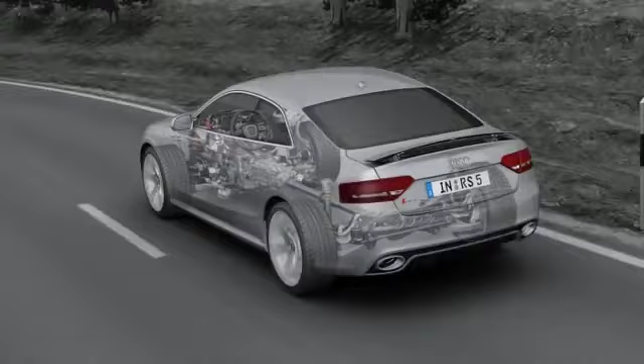The Quattro permanent four-wheel drive system has a long tradition stretching back over 30 years. It permanently and optimally distributes the power from the engine to all four wheels, providing a high level of active safety and reliable traction on practically all surfaces and optimal straight driving. Its permanent safety advantage makes it far superior to other all-wheel drive systems that have to be activated.

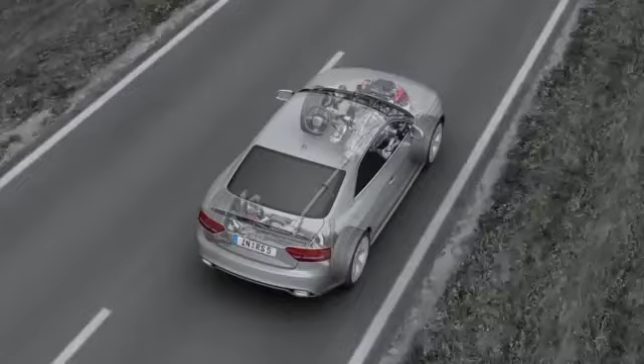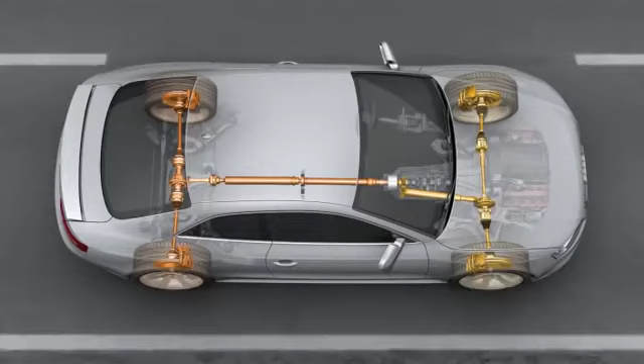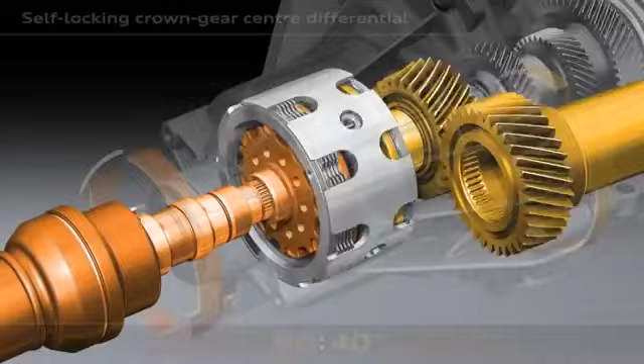The principle is simple: just as four brakes provide for better deceleration, four driven wheels provide for better acceleration and greater lateral stability. The new Audi RS5 sees the introduction of the latest generation of Quattro with crown gear, center differential and torque vectoring. The task of the center differential is to distribute the drive force of the engine to the front and rear axles.

If, for example, one of the wheels on the front axle starts to spin, the crown gear center differential will immediately spring into action. Up to 85% of the drive force will promptly be fed to the rear axle. This can be seen here with the turning differential gears.

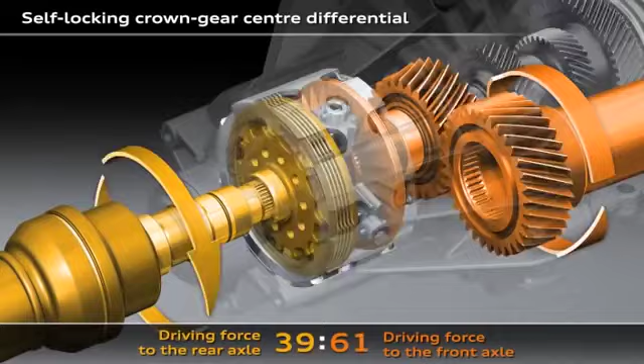If the wheels on the rear axle start to spin, the crown gear center differential will immediately feed up to 70% of the drive force to the front axle.

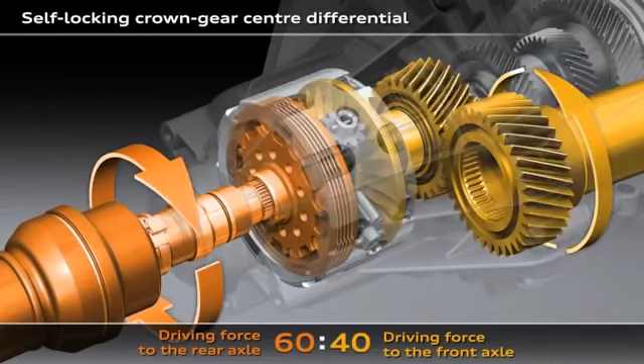In its basic configuration, 60% of the drive torque is fed to the rear axle and 40% to the front axle. Here you can see the structure of the crown gear center differential, the heart of the Quattro drivetrain.

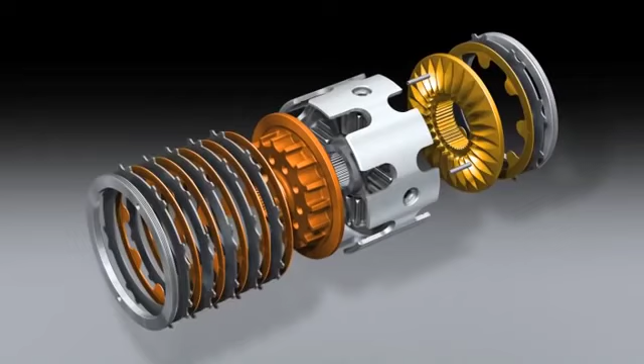The drive force is introduced via the components illustrated in grey. The gold-coloured parts drive the front axles and the bronze-coloured parts drive the rear axle.

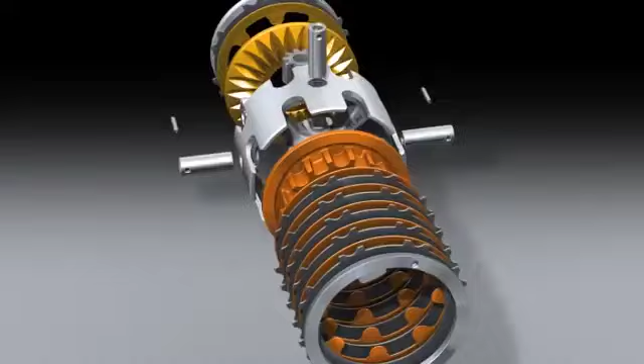If there is a difference in speed between the front and rear axles, the center differential will spring into action and generate a locking torque with the plate packs. That means the drive force will be distributed to the two axles according to actual requirements, allowing more power to be transferred to the wheels.

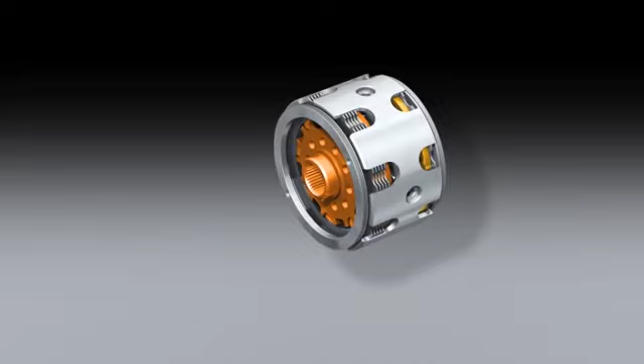The new crown gear employs a metal cap to keep flow losses to a minimum. The basic distribution is generated by gears with different diameters meshing with the two crown gears.

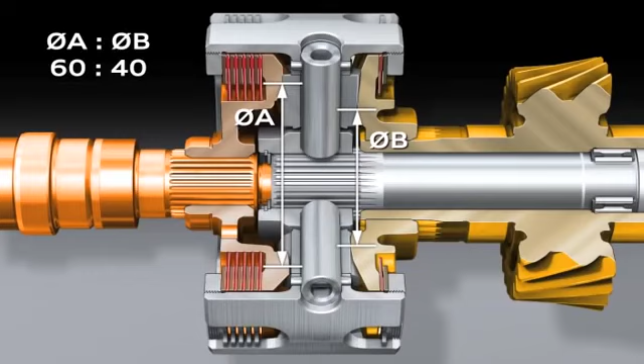The arrows symbolize the flow of torque or force. For example, if the wheels on one of the drive axles are unable to transmit the full force, the center differential and its differential gears will spring into action. The force will immediately be fed to the axle with the better traction, with zero time lag.

Without ESP intervention, this happens with up to 85% to the rear axle and up to 70% to the front axle. With an electronic control system, up to 100% can be fed to a single axle.

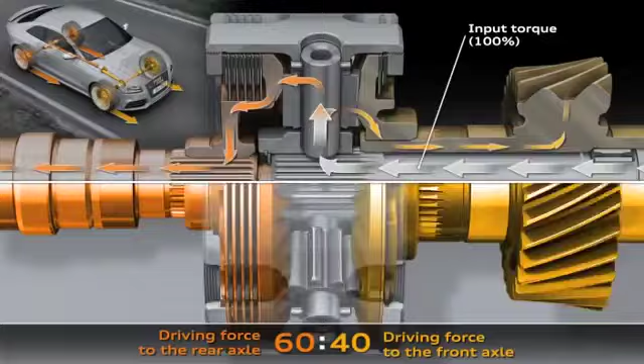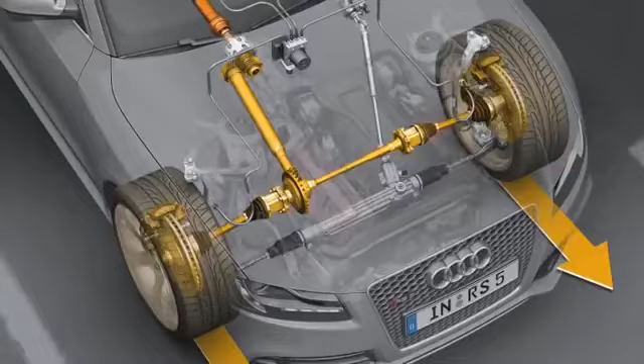The good dynamic performance characteristics of the Audi RS5 with crown gear center differential are noticeably extended in conjunction with torque vectoring. An additional steering torque is generated according to the situation and the driver's needs.

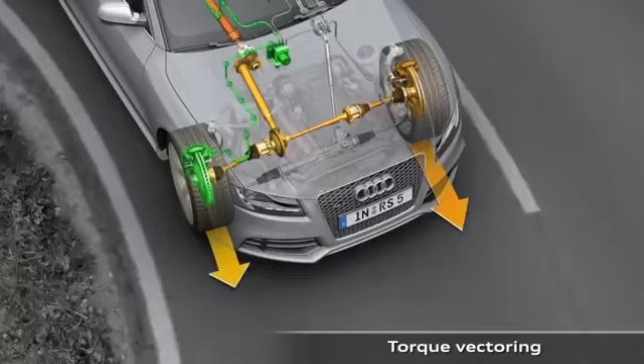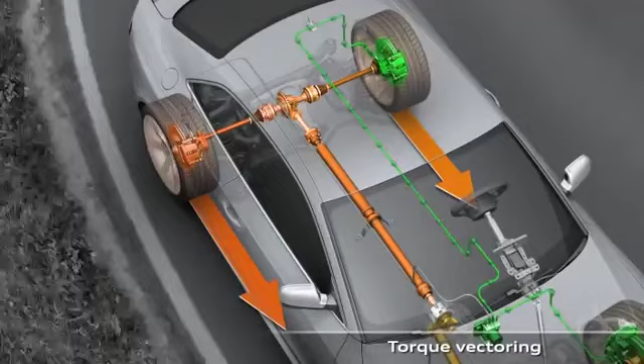Finely metered braking torque is applied to the two wheels on the inside of the curve. This creates a difference in drive force on the left and right-hand sides. At the same time, the longitudinal drive force distribution is optimized according to the driving situation by the ratio of the brake force application on the front and rear axles.

When pulling away and when accelerating rapidly, more drive force is fed to the rear axle. The combination of crown gear center differential and torque vectoring on the Audi RS5 provides for precise handling even when cornering.

This happens with zero time lag, in accordance with the driver's steering and acceleration commands. The dynamic drive force distribution allows excellent exploitation of the traction potential, good track stability, and outstanding agility.

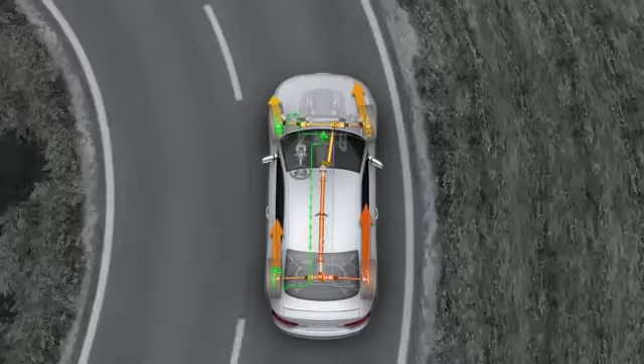The torque vectoring system was developed by Audi to act before the wheels start to spin, reducing undesirable effects. The combination of Quattro drive system with crown gear differential and torque vectoring gives the Audi RS5 outstandingly precise control right up to the car's handling limits.